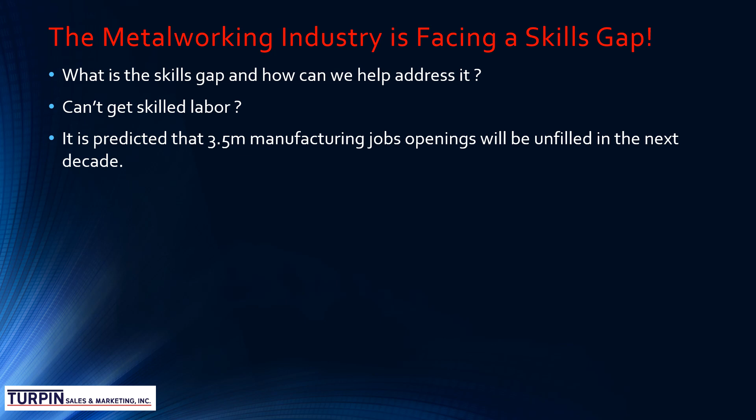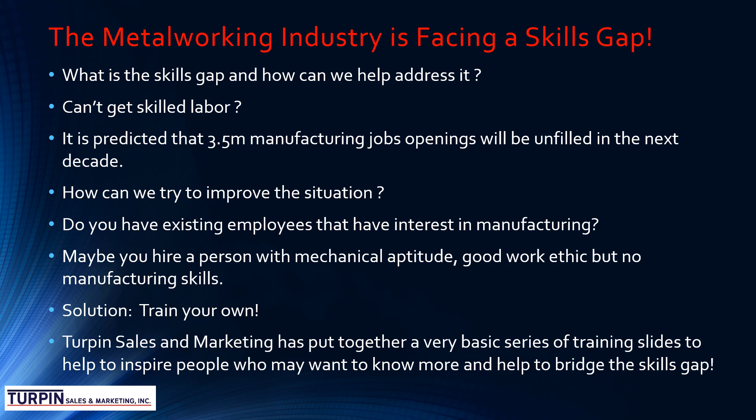It's predicted that 3.5 million manufacturing jobs will be unfilled in the next decade, which will be devastating for this industry. So what can we all do to improve this situation? Do you have existing employees that have an interest in manufacturing? Maybe you hire a person with mechanical aptitude, good work ethic, but no manufacturing skills. So what's the solution? Train your own. So Turpin Sales and Marketing have put together a very basic series of training presentations to help to inspire people who may want to know more about this industry and help to bridge the skills gap.

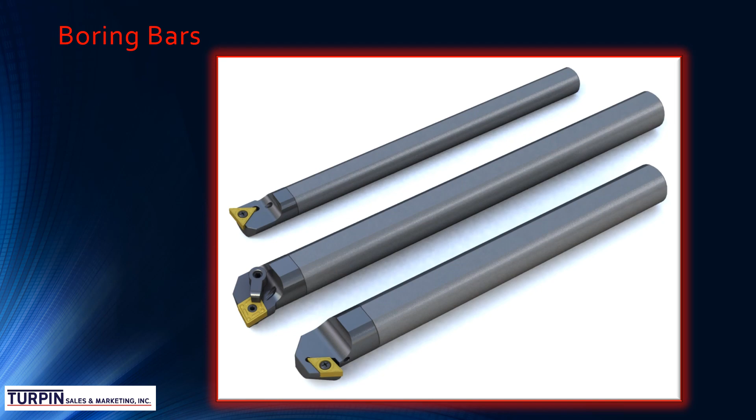As with turning tools described in our earlier presentations, boring bars conform to 2 standards: an ANSI standard, which is the American National Standards Institute, and is always done in inches. The ISO, or International Organization for Standardization, is the metric version of that. It's a series of letters and numbers which define the boring bar. So from that part number, you can work out exactly what that boring bar is, what its diameter is, what insert it carries, how long it is, etc. And I'll go through that in the next few slides.

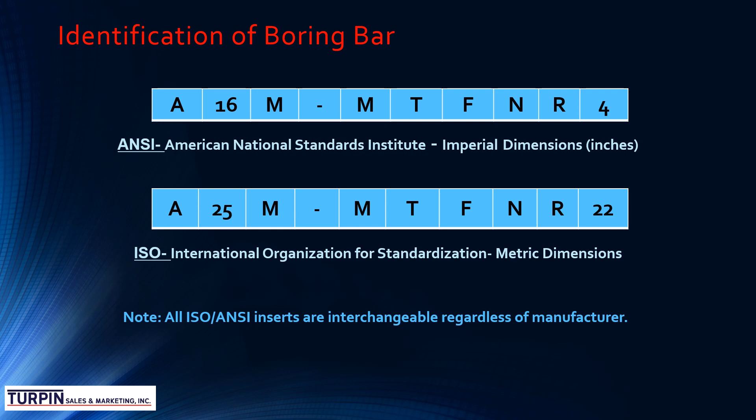The first letter in the series, in this case it's showing an A, defines the type of boring bar. Is it a steel boring bar? Is it a carbide boring bar? Is it 6 times D? Is it 3 times D? Does it have through coolant? So you can see the one we selected here, which is A, is a solid steel bar with coolant through the middle, and it would go up to 3 times D, which is 3 times its diameter. So a 1-inch boring bar would be 3 inches long.

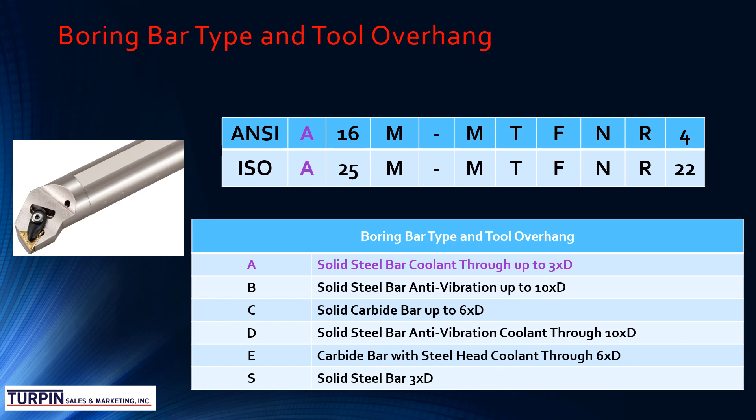The next number, on the ANSI 16, on the ISO 25 shown in this example, tells us the diameter of the boring bar. The ANSI and the ISO differ. In the ANSI, it is 16, which is equivalent of 16/16 or 1 inch. So that number is always in 16ths of an inch. If it's an 8, it's a 1/2 inch bar. If it's a 16, it's a 1 inch bar.

The ISO is much more simple. It's in millimeters, so 25 millimeters. It can be 40 millimeters, 32 millimeters, etc. But that's the easy one. 25 millimeters. The ANSI is 16/16, which is 1 inch.

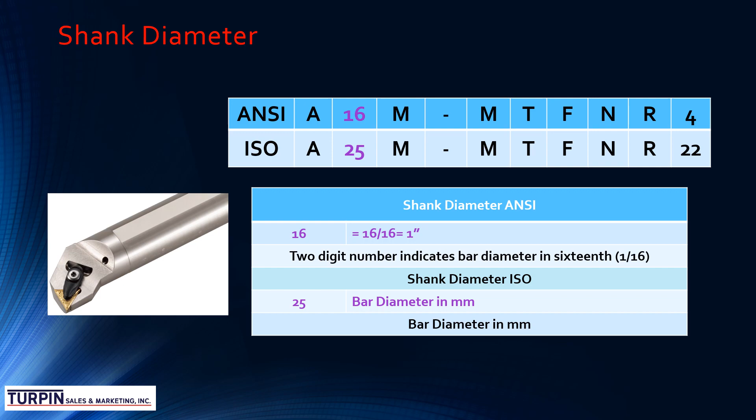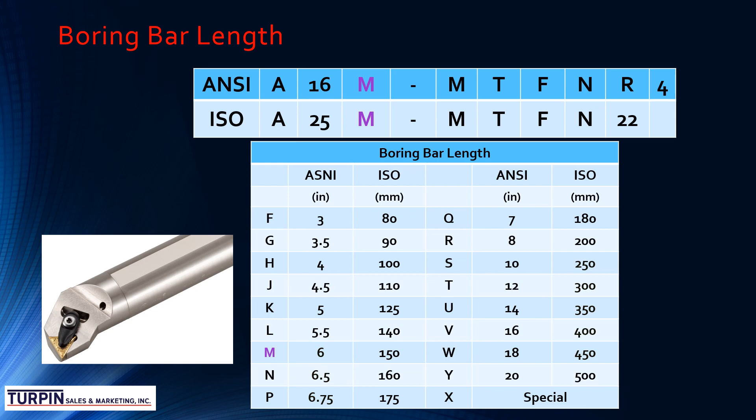The next letter, in this case M, just describes the length of the boring bar. Again, ANSI and ISO differ. You can see if we look at the M, that would be 6 inches or 150 millimeters for the ISO. So really simple. Just look up the letter and it gives you the overall length of the boring bar. So far we've described the type of boring bar it is, the diameter of the boring bar, and the overall length of the boring bar.

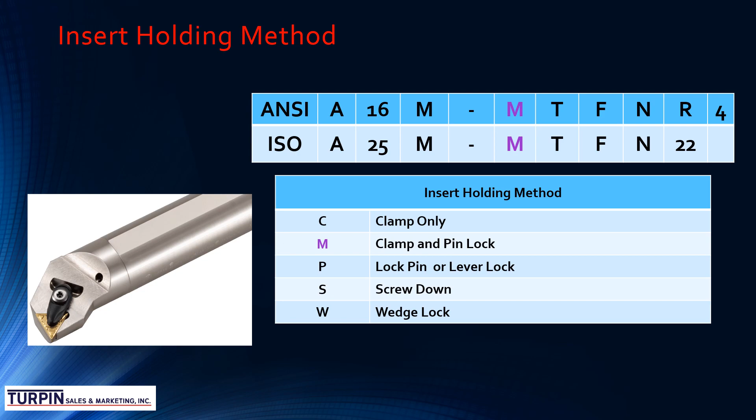The next set of letters and numbers are based around the cutting information. So the next letter, in this case M, describes how the insert is held in the pocket. An M is a clamp and a pin. A C is a clamp only. A P is a lock pin or lever lock. W wedge lock, S screw down. I'm not going to go into those, but those are all standard ways of holding the insert that the major manufacturers use. So again, look in the table, it will tell you how that insert is held into the pocket.

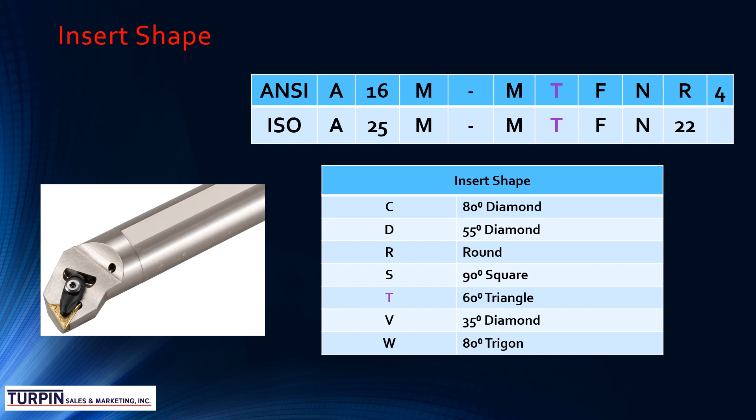The next letter, in this case a T, describes the shape of the insert. The ANSI and the ISO shape of the insert conforms throughout turning tools, inserts. Anything that complies to the ANSI and ISO standard will use the same letter to describe the shape of the insert. In our case, it's a T, which is a triangle. A C is an 80-degree diamond. I'm not going to go through all of these. A W is an 80-degree trigon. So this letter is the same letter on an insert. So if you look up, say, a CNMG, for instance, that C would stand for 80-degree diamond. This conforms across all ANSI ISO standards.

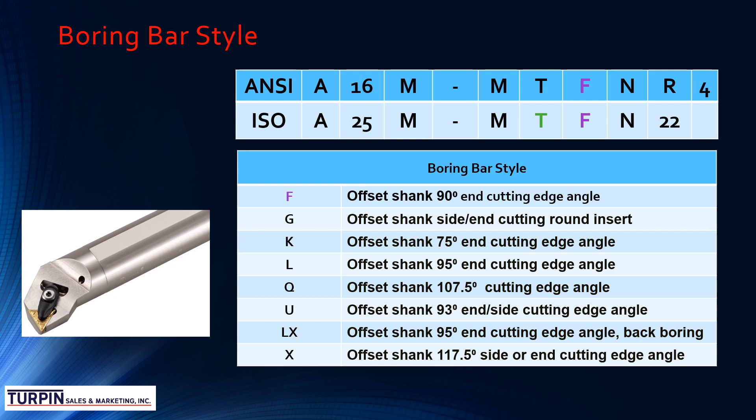The next letter, in this case an F, describes the angle that the insert is presented to the component at, or the cutting angle. So you can see that an F is a 90-degree end cutting angle. So you can see on the picture that's a square angle. And there are various different angles. K is 75, Q is 107.5, U is 93. So again, that letter describes the lead angle of the boring bar. Not particularly the lead angle of the insert, but it's the lead angle of the boring bar.

The next letter, in this case an N, describes the insert relief angle. Again, this conforms to ANSI and ISO standard. So if you looked at a CNMG insert, the N would tell you that it's a 0-degree negative insert. The same applies to the boring bar. The B is 5 degrees, the P is 11-degree positive. So this will tell you the angle that the insert sits into that boring bar.

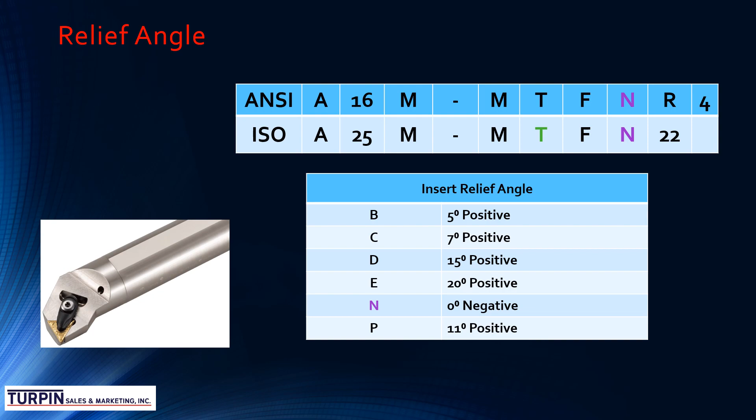The next letter is really easy. Left hand or right hand. In this particular item, we show an R, and you can see on the picture that is a right hand boring bar. Only two options, left and right. Really easy one.

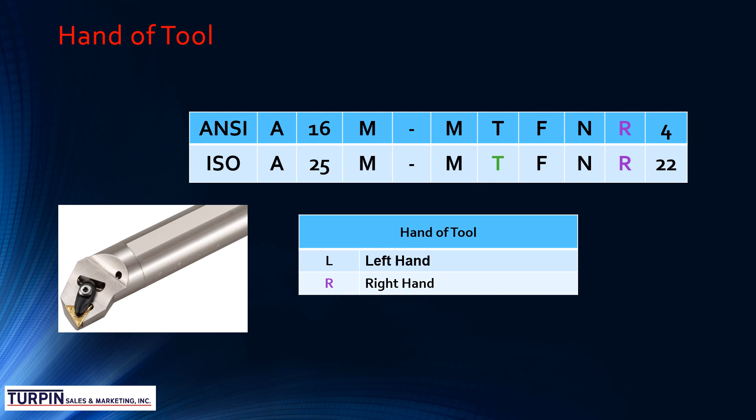Well, that concludes our 5th section in the series of basic machining videos. So now with the boring bar nomenclature matching the insert nomenclature, you could work out what that boring bar looks like and which insert to pick that would fit into that pocket.